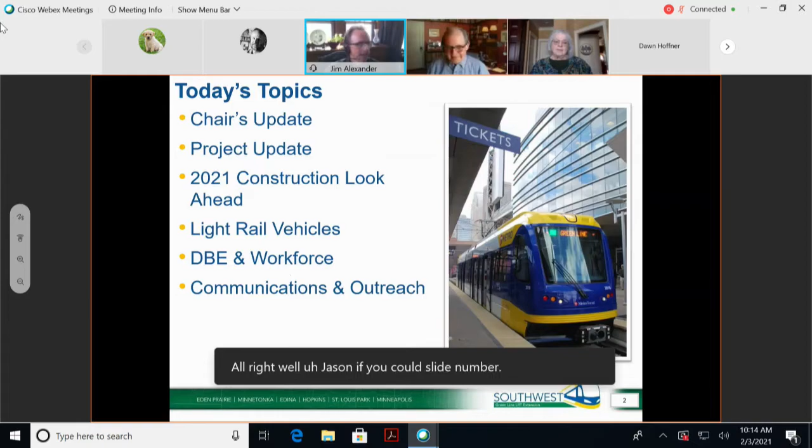All right, well, Jason, if you could advance to slide number 5, I think, to get us going here. So this is kind of highlights overview of the overall project. As the Chair mentioned, we have a full funding grant agreement now in place as of September. So that's a good thing. We're now fully funded. And there has been quite a bit of activity out there.

If you haven't noticed, they've got a lot of bridges happening and other structures getting put in place, 35% complete. And you see the list of items that we've been working on thus far. An important piece I want to note is the private utilities. 94% of that, nearly 1,000 conflicts that we have for private utilities. That's a pretty significant milestone to achieve for this type of project. These type of elements usually plague projects such as this. And so we're sitting in a pretty good spot with that.

Excuse me, I'll take a little drink here. I'm getting a little hoarse.

On the public utilities, that's handled by our general contractor doing that work, and that's well on its way as we're sitting today. Our systems contract is well underway. That's more of a design build process right now. They're going through design reviews, and that work will be following on our civil work as we get that done. Franklin, I have a couple images to talk about our O&M facility. We're doing some modifications there. That's well on our way to get completed this year.

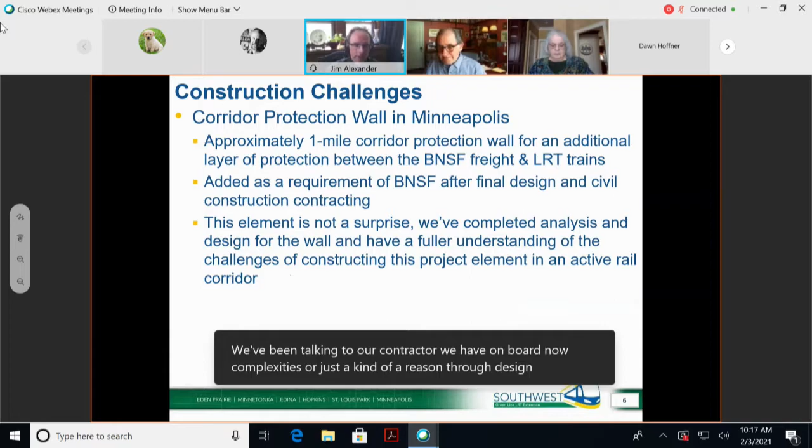And I'd just say, this element itself is not a surprise, but the challenge is that as we were getting bid documents and bids from the civil contractors, we were still going through environmental review. So as a result, we had to look to add this as a change order. We knew that going in, but as we've been talking to our contractor that we have on board now, the complexities have arisen through design reviews with BNSF and also just getting the work done. So maybe I'll go to the next slide there, Jason.

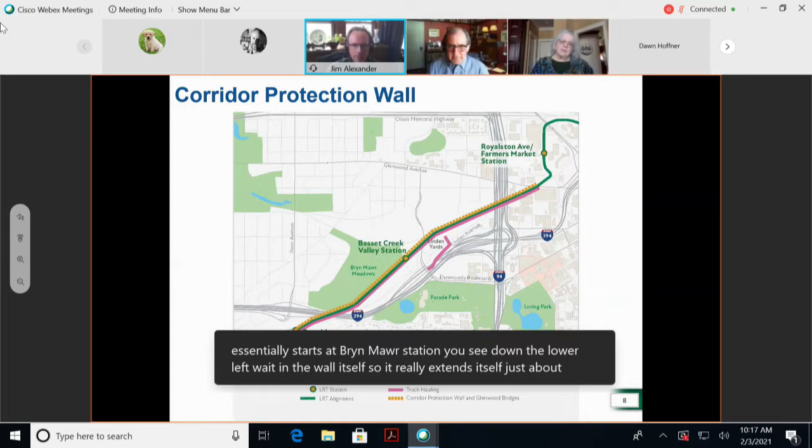So this is the location of where that corridor protection wall is. Go to the next slide, Jason. Kind of a little broader image. Essentially starts at Bryn Mawr Station, you see down the lower left, and heads its way. And the wall itself really extends just about east of 94, you see running up and down the slide there. And maybe the next slide there to kind of show you what this looks like in cross section.

So down below is the corridor protection. And as you can see, it's really integral to the light rail guideway that we're building under that civil contract, and we have a freight train to contend with. And as we've been underway with work in this corridor, we're seeing the challenges we have with operating within an active freight line. We knew that going in, but the reality of actually doing the work out there, we do have some inefficiencies of doing the work here.

For example, if a crane is located anywhere close that could potentially foul the tracks, we have to shut down operations. We have BNSF flagging out there to make sure things are safe. So it is something we have to do, but it does impact the productivity. And so this is going to be a change order to the contract that we're currently in negotiation with. So as the chair had mentioned, we don't have costs, we don't have the schedule finalized. This in itself is a big effort, and we're in the process of getting that negotiated and figured out with our civil contractor. I do have a follow-up slide to talk about this and the other element here, but maybe I'll pause there for a moment if there are any questions on the corridor protection wall, Chair.

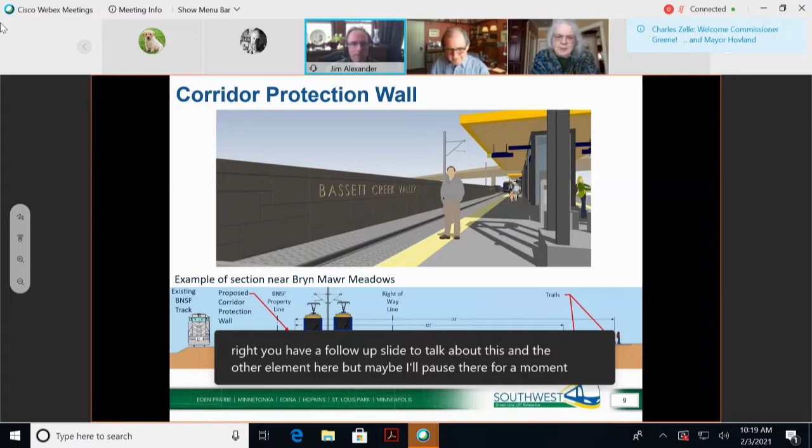Any questions for Jim on the big wall? All right. We'll move on to slide 10 then and talk about the secant.

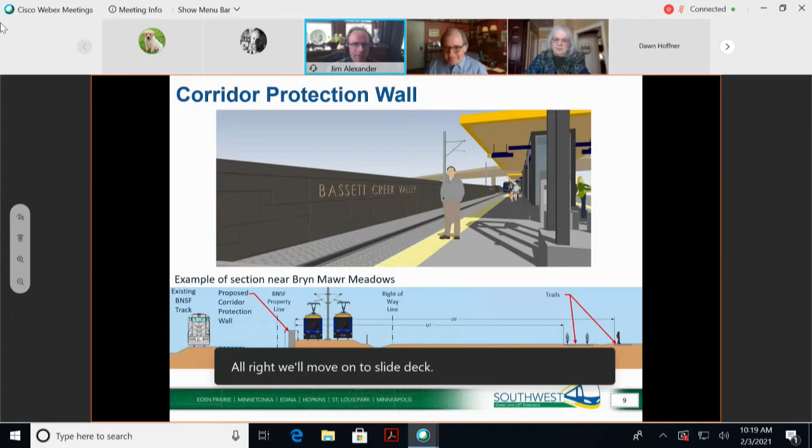So this is our other challenge, and this is also in Minneapolis in the Kenilworth Tunnel. We had experienced some settlement as we're putting in the sheet piles that will support the earth, if you will, as we build the tunnel itself. And I'll show some images of what that meant.

But in terms of looking at alternative methods, which we need to do because we're running next to a 10-story condominium building and an associated parking garage with the Calhoun Isles condominium buildings there, we need to really take a look at a different approach. And it's really out of an abundance of caution, we had to look at some alternative method to really protect those foundations of the adjacent buildings. And I'll show a cross section to give an appreciation of that. So if you could go to the next slide there, Jason.

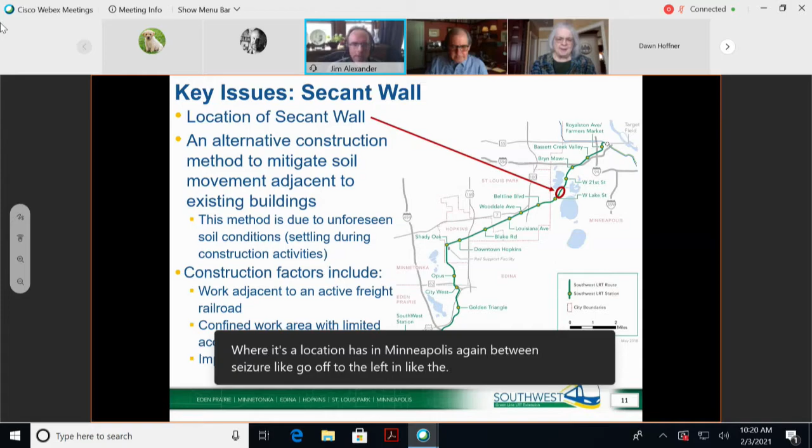So this is where the location is in Minneapolis, again, between Cedar Lake off to the left and Lake of the Isles off to the right, those blue water bodies there. And as I indicated, we're looking at an alternative construction method. We're currently finishing design on this secant wall. Maybe go to the next slide, Jason.

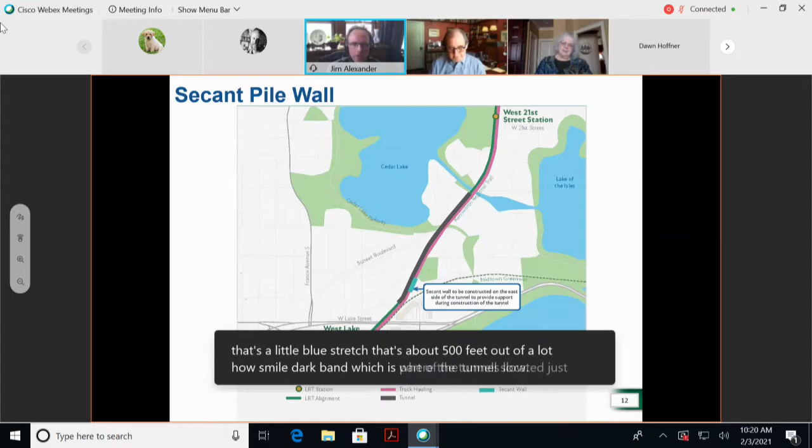Kind of get an appreciation of where that's located. So that's a little blue stretch. It's about 500 feet out of about a half mile of that dark band, which is where the tunnel's located, just north of West Lake Street Station, and just stops short of that channel between Cedar Lake and Lake of the Isles.

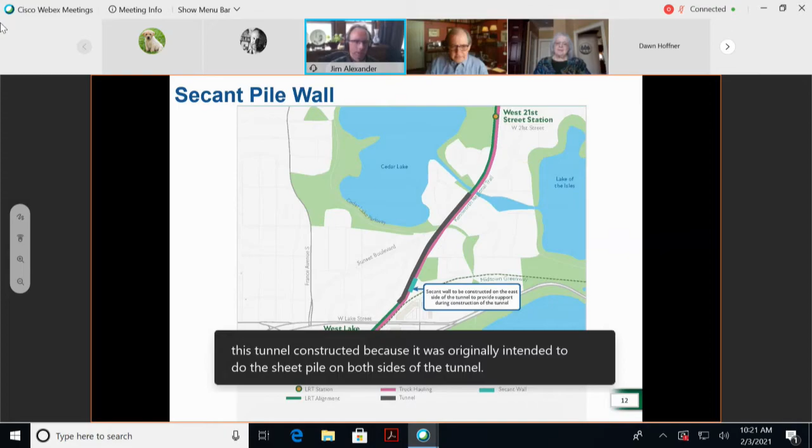And because of this, we've had to kind of retool and figure out how to get this tunnel constructed, because it was originally intended to do a sheet pile on both sides of the tunnel along that whole stretch. And because we've had to leave that 500-foot gap out of play for the moment until we get design done, get a change order negotiated, we have to work with the contractor on sequencing of the tunnel construction. So maybe next slide there, Jason.

So this hopefully gives you an appreciation of what we're up against here. The original plan off to the left shows the sheet pile walls on either side, and you can kind of see what a sheet pile looks like if you're not familiar with that. Sheet piles are generally vibrated or pounded into the ground. In this case, we had to be very mindful of the vibration sensitivities in this area. So we had a press-in piler put the sheets in.

The challenge we encountered is that due to boulders and really the density of the soil, we had to auger ahead of the sheet pile as we're pushing into the ground to allow the sheets to get in. Normally, the vibratory method would be able to drive these things pretty easily, even with those boulder materials. But because of the augering, we experienced some settlement right adjacent to the tunnel excavation itself.

And if you can imagine, it's not shown on that left drawing there, but there are footings that are very close to the tunnel there, we're talking feet and inches away from the sheet pile. We didn't want to risk the potential of damage to the foundations of the parking garage and that condominium building. And so we came up with an alternative method that you see on the right, which has a secant pile wall. And you can see what that looks like in plan view down below.

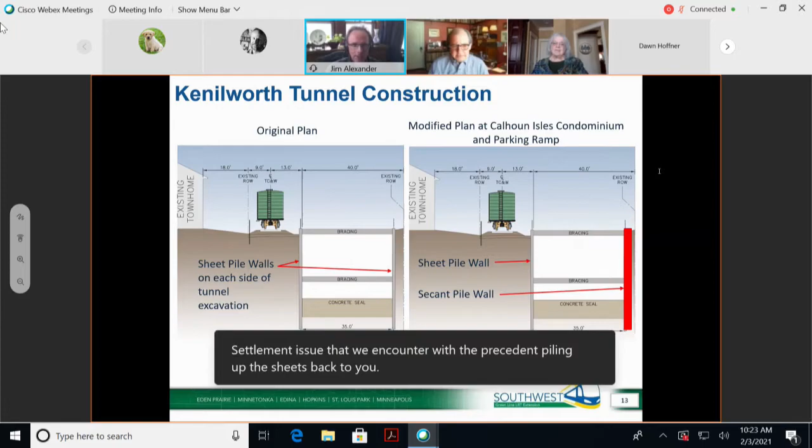I think there's been a lot of questions about, are we modifying the design of the tunnel? We are really not. As you can see on the left, original plan compared to the right, the tunnel itself is essentially about the same. We do have to narrow up the wall on the right side of the tunnel a little bit, but it's still going to be able to provide the strength that we need to have here. So what's really different here is we're going to be installing the secant pile wall for about 500 feet to support that area as the contractor builds the tunnel.

So maybe I'll pause there for a moment if there are any questions on the secant, because it is kind of involved. Any questions?

I have to say, Jim, and just as a comment, we're all becoming kind of amateur engineers here, but you've explained what the secant pile wall is, and I invite others to walk in this area. You can see how narrow this construction zone is, and we really are threading a needle with some very specific, robust reinforcement. And I think working with the Condominium Association, they've gained some confidence that we're actually, in an abundance of caution, doing the right thing to not take any risk.

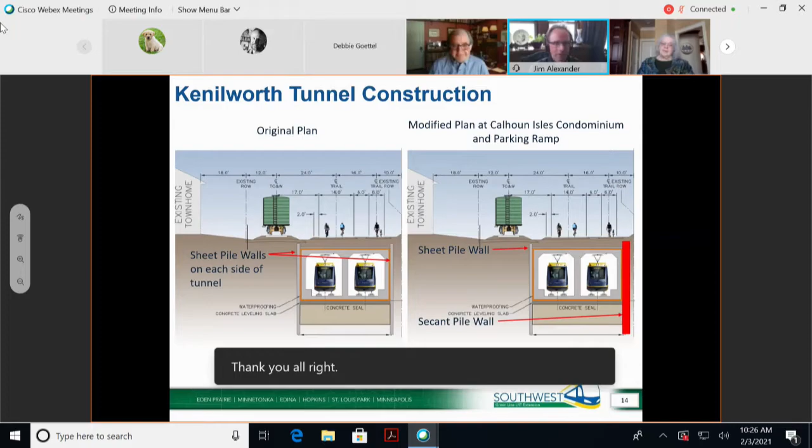Maybe, Jim, this is Jim. Oh, yes. Maybe I could ask you a quick question about how did you pick that particular type of reinforcement technique, the secant wall? Where else is that used, or why did you decide on that? Sure. This was really chosen out of just our confined space. There are many other types of retaining wall types you could use, but given that we had limited right-of-way, we had to go to something that we could stay within our right-of-way, and this does that.

This is actually used, if everybody's familiar, at a parking garage over by the Lagoon Theater; you can actually see the secants as you're exiting the structure. You can kind of look off to see the wall, and you'll see a bunch of secants. So it's a common practice. It's more expensive than the sheet piling, but this is really the alternative we need to go to given the limits. If we had right-of-way going back several feet, we could have tiebacks, those type of things, but we didn't have that luxury given the proximity of the apartment.

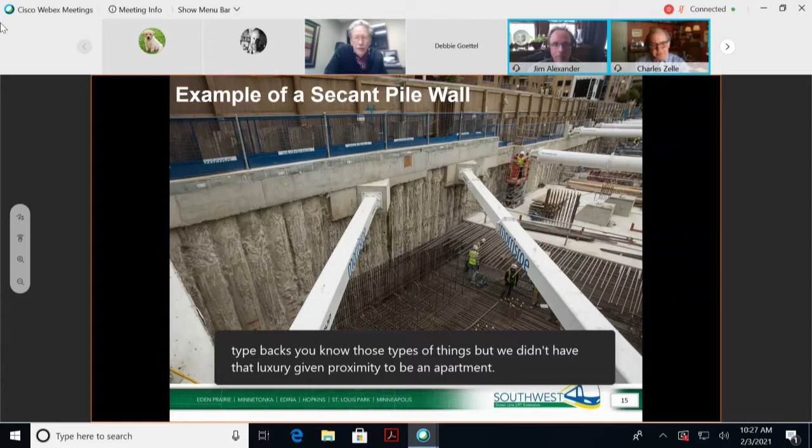But here's a good picture of one, so you kind of get an idea. Yeah, it's extraordinary, really. Yeah. So this is just an image I took off the web. This is not our project, but you can see the secants off to the left as a bunch of columns that will support, and these white members going across.

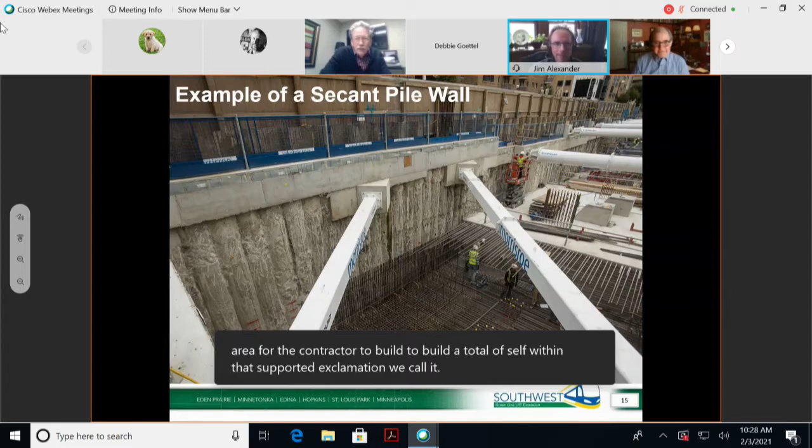Those are called struts; essentially the struts go from one side to the other, as you see in the distance. We won't have these diagonal struts here, but it allows an area for the contractor to build the tunnel itself within that supported excavation, we call it. Okay, thank you. Next slide there, Jason.

So maybe getting to the question from the commissioner is that, you know, both of these elements, I'll just say, are major projects by themselves. The corridor protection is over a mile, and we had to go through a really extensive review process with BNSF. This was an important feature for them, to make it robust in their eyes, and so we met all those requirements. But because of that, it's going to be a fairly costly item.

Now we are in the process, on these next steps, of negotiating a change order with the contractor on this corridor protection. So I don't have a cost for that at this moment, but we hope to have that identified fairly soon.

The other component is a secant wall, where we're just finishing up design plans. We look to have those done this week and get those into the contractor's hands. And we've been talking to the contractor about what this secant is going to look like to help minimize time and make sure that we're heading on a good path on this. And we'll need to initiate a change order on that piece.

And then there's also that 500-foot segment that I mentioned where we have to have the secants in. That really causes resequencing the tunnel construction compared to what the contractor was originally going to do with just sheets going down the whole half mile of alignment. And so we'll have to be negotiating a tunnel construction resequencing. This all leads up to

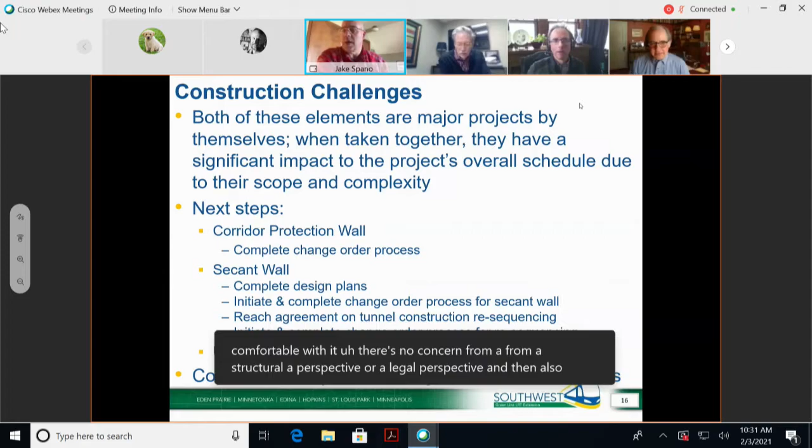My question really is about, and I know there are a few attorneys in this meeting right now, I'm not one. I'm curious if the city of Minneapolis and their engineers have looked at this and are comfortable with it, with no concern from a structural or legal perspective. And also, given the proximity to the condominium owners, I'm curious what their engagement has been so far, or their legal representation and construction folks, just to make sure that we're not heading down a process where, in 5 years or so, there are concerns and problems.

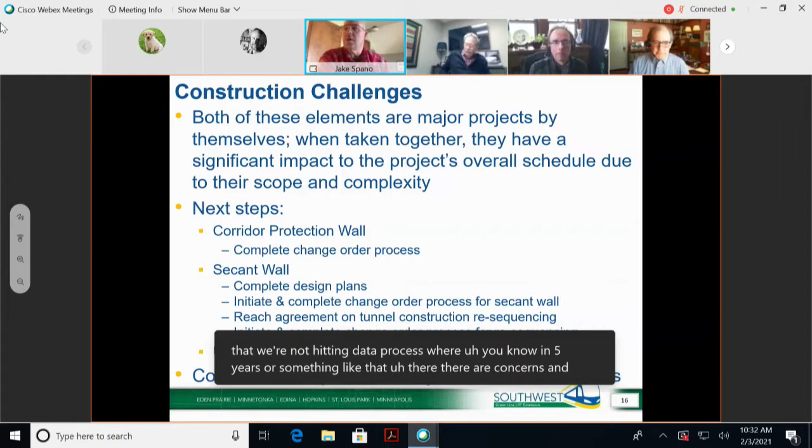So I'm curious to know, from both an operational and construction process perspective, as well as a legal perspective, where the city of Minneapolis is at. Maybe somebody from the city of Minneapolis can speak to that, but also the condo association and the other folks that live in that area. Thank you. Yeah, great, Mayor. Great question, and I'll just jump in to say hats off to the Minneapolis Public Works team, from the director to the chief engineer. Weekly meetings, they've really been at the table. But Jim, why don't you take us through this?

Yeah, I'm not sure who all from Minneapolis Public Works is here, but maybe I could start it off. We've been coordinating quite a bit with the city on both these elements in terms of getting this work done. We've also been coordinating with the Calhoun Isles Association. We have a small work group that we meet with at least every other week, and we talk about construction issues as well as this secant wall. So everybody's aware of this, and we're trying to proceed with eyes wide open on this piece, knowing it's a big change.

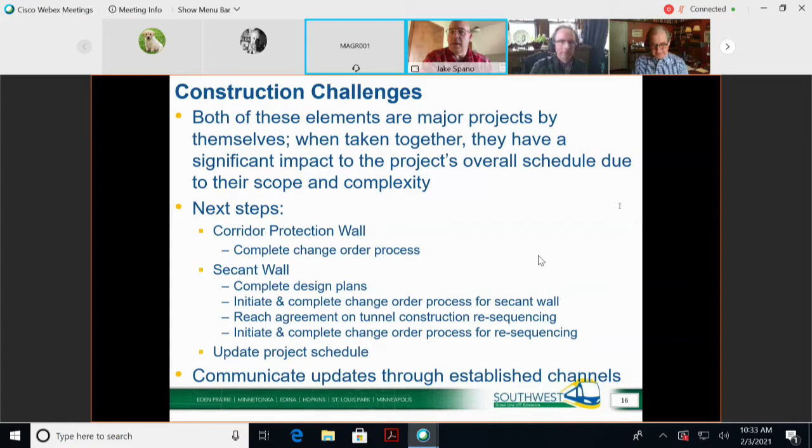Well, I just wanted to raise it because, obviously, having a conversation about it is one thing. Making sure that our legal I's and T's are dotted and crossed is another. So I just wanted to make sure that gets raised so that we proceed with, again, eyes wide open, but with all of our bases covered.

Whoever's typing, would you go on mute, please? Yeah, I remind people to press mute if you're not talking. Jason, that might be yours.

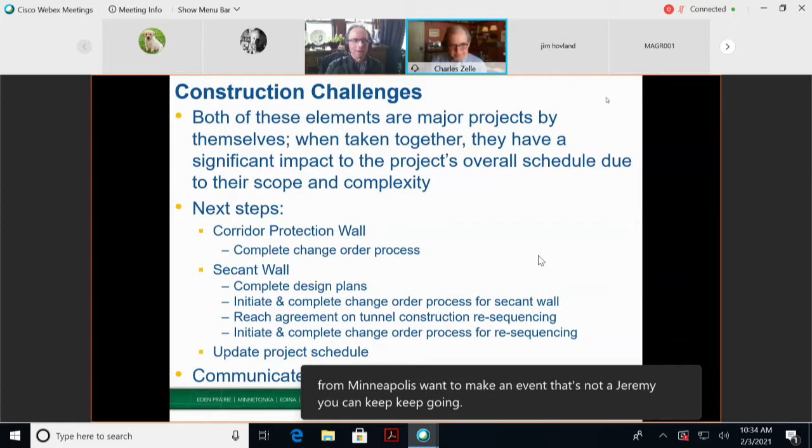Okay, let's move on to, I think we can scoot down to slide 19, just to kind of expedite things. Wanted to really kind of, it isn't just a bad news story here. There's been a lot of work out there, and if you hadn't had the opportunity to kind of cruise down toward Eden Prairie through all the cities, I welcome you to do so. We've got a lot of things out of the ground now, and this starts out at Southwest Station. Just to get you all grounded here, we are building a station that will cohabitate SouthWest Transit bus activity with our light rail trains, and we're building a 450 stall ramp. You can see off to the right here. That's kind of the starting point of getting the foundation work, starting the column work.

All these columns out here, we have about 27 miles of piles that are going to ultimately go into this station. We have about 70% complete. Still a bit of pile work to do, but this area is well underway in terms of the work. Next slide, please.

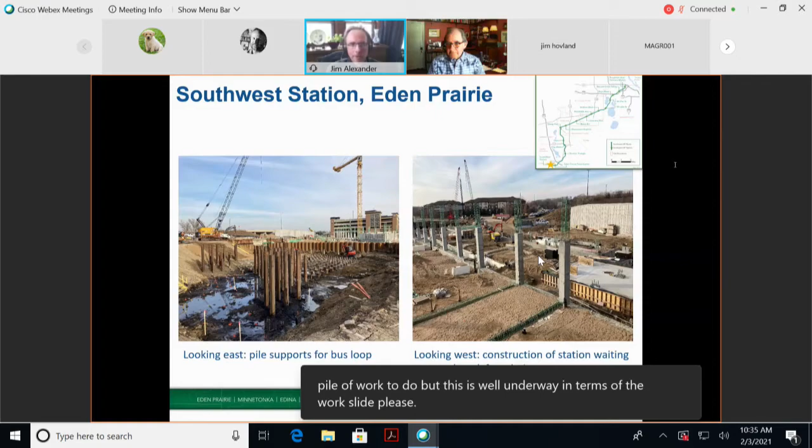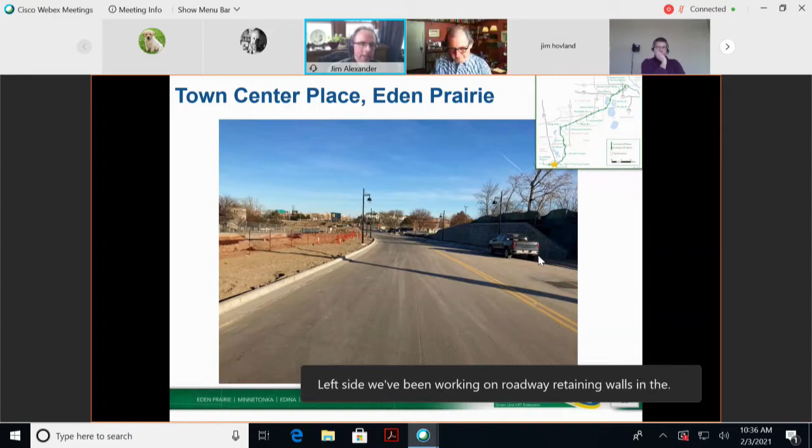Make our way just east of Prairie Center Drive, or Eden Prairie Town Center Station. This is road work. Guideway will ultimately be off to the left side. We've been working on roadway and retaining walls in this area. Next slide. I think the next slide is the station itself. So we kind of turned ourselves back to look west at the Town Center Station, starting to take shape. The retaining walls are part of the project that we built last year. Next slide, please.

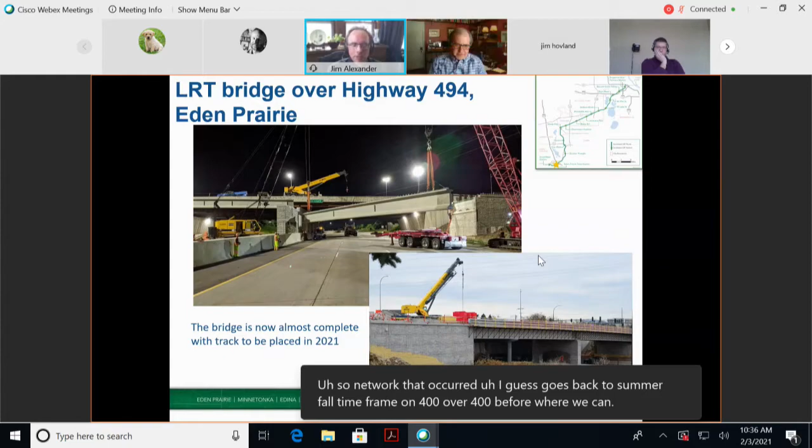Some night work that occurred, I think this goes back to the summer-fall time frame, on 494, where we installed beams for the LRT bridge that goes across. Next slide, please.

And just kind of further inching towards the east, and all these photos have a map to show you the location of where these photos are taken if you're interested. So this is down Flying Cloud. You can see some of the retaining wall work off to the right. We'll have our guideway in that area. This is just south of the Valley View Bridge, which I think is coming up next.

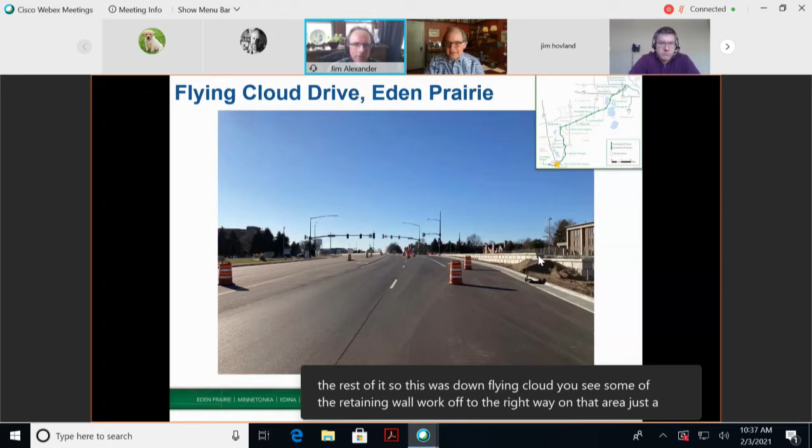Another bridge over Nine Mile Creek. This goes over Flying Cloud Drive in Eden Prairie. The deck work is out and now done. This is, of course, earlier this summer, not just a few days ago. We're a little chillier today than what this shows. Next slide, please.

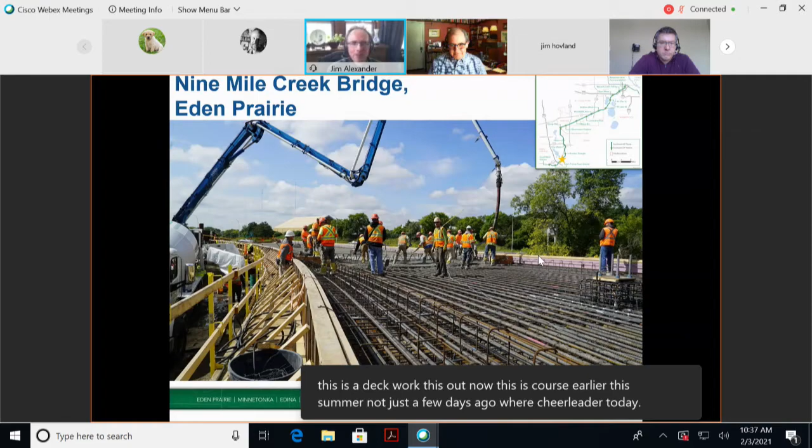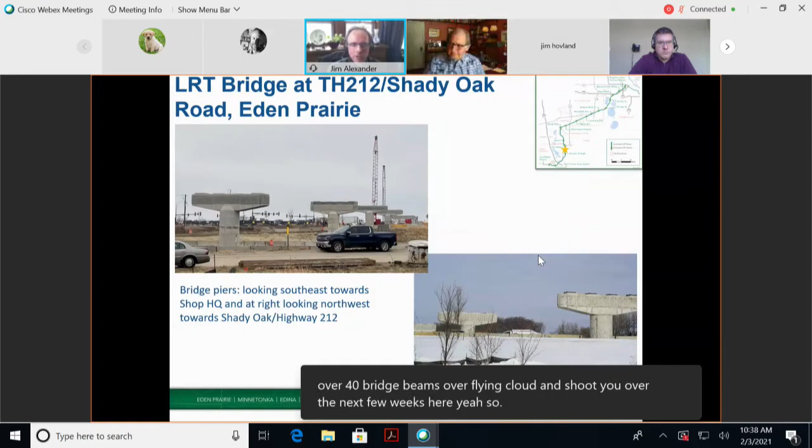This is Golden Triangle Station. So this is near 70th as we look towards the north, and off in the distance on the next slide we'll see another significant bridge that lifts off of the station. Next slide there, Jason. For the bridge that goes over Shady Oak and 212, the contractor is actually involved in putting bridge beams over Flying Cloud and Shady Oak over the next few weeks here. And so that work is still ongoing here. Next slide, please.

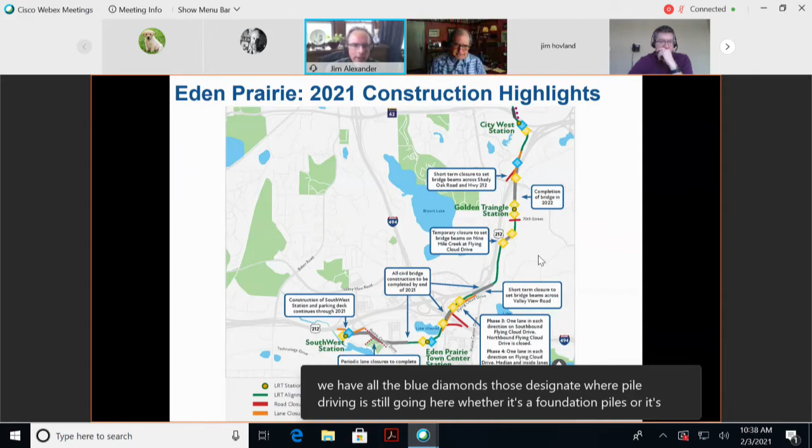And so these maps are intended to show more the high profile items and things to note. Where we have the blue diamonds, those designate where pile driving is still going, whether it's foundation piles or sheet pile for shoring. You can see at Southwest Station, we still have some work down there to do. Another 30% of that 27 miles of piles still to be done.

A little bit of work around the Town Center Station for retaining structure, fairly minor. Up by Shady Oak, just south of the City West station there, we still have a couple of bridge piers and an abutment to do for piles. And at City West, we have a lot of retaining structure up there that would require some shoring.

The other point that I wanted to note is where we have red line work, that's where roadway closures are anticipated. We have a couple of phases of construction still to do on Flying Cloud, phase 3 and 4, where we are closing various lanes to get our work done down there. And the orange line work is where there's a lane closure.

So you can see in terms of roadway closures, we have the on and off ramp at 494. And as we scoot up towards 70th, that'll be closed later in the spring when work can commence again after the thaw. And we also have an off ramp that goes up to Shady Oak, up the top there, that will continue to be out of service until we can get that work done along that stretch going up to City West Station.

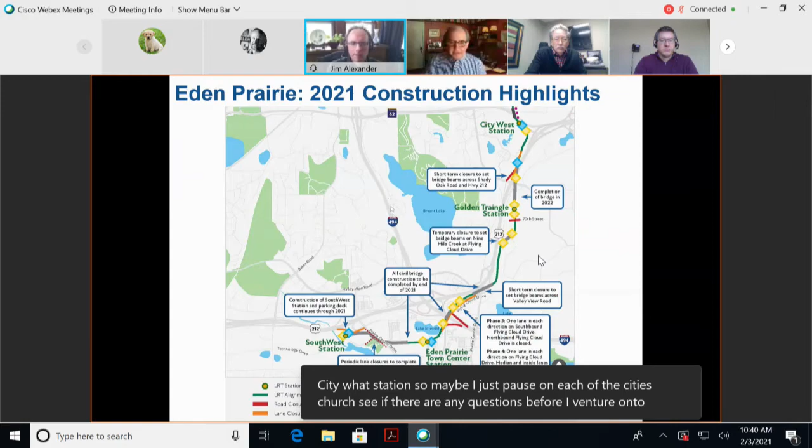So maybe I just pause on each of the cities, Chair, see if there are any questions before I venture on to the next. Great, and there is so much happening in Eden Prairie, well, in every city, but any questions on this activity? All right. Mayor Hovland, you're raising your hand. You might be muted.

Incredible amount of activity in Eden Prairie, and just wondering, as you move up into Minnetonka and then into Hopkins and then on into St. Louis Park, what kinds of activities are we seeing in those respective communities? Yes, I will have some slides to talk to that. Yeah, stay tuned, Jim. We're working backwards.

We're working north here. I don't hear Jake complaining, so there must be good things coming.

I'm not, and as a matter of fact, Jim presented to council last week, and for Mayor Hovland's awareness, I think Jim estimated we're probably a quarter of the way through construction in St. Louis Park. I think our biggest issue, just for everyone's situational awareness, is a strong sense from us, and I'm sure other communities along the line share it, about making sure that, to the extent reasonable, practical and safe, we get the bike trails back open, even if it requires temporary detours in other areas.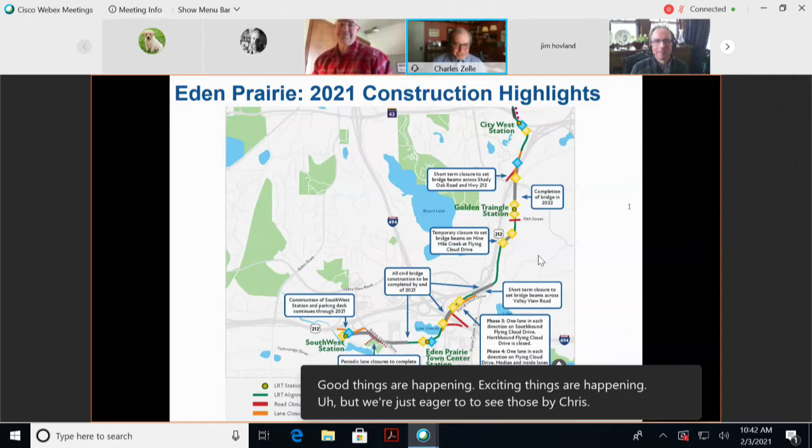Thank you, Mayor, and Jim, you can move into the next cities, but I will say I have learned new places within Hopkins and St. Louis Park I never knew about with all these detours. But it would be good to get that back in place. Keep going, Jim. Okay. All right.

Jason, let's go on to slide 33 and we can talk about the 62 tunnel. This is an earlier image. We were still shifting the lanes around on 62, but we've essentially finished the structure for the tunnel on the north or east end on the Minnetonka side, and that's where work is now commencing on the south side in Eden Prairie.

And we really appreciate MnDOT and the cities cooperating with us. It's been quite an endeavor to get all these lane shifts going. And I know it's been a challenge. We keep knocking on people's doors to ask for things.

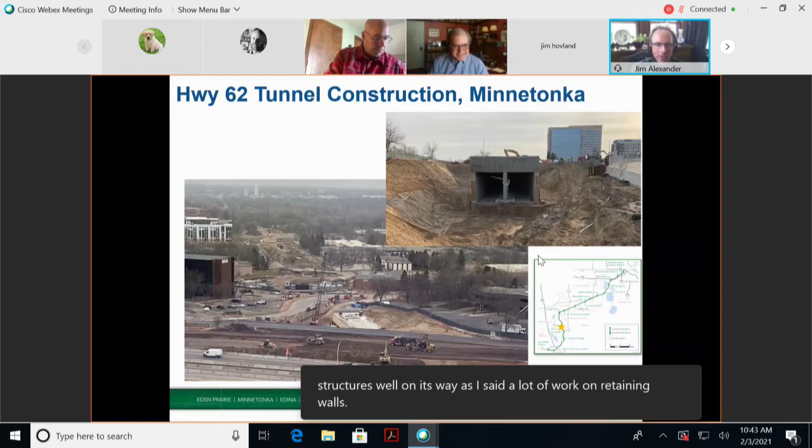And I appreciate you at least hearing us. But this structure is well on its way. As I said, a lot of work on retaining walls and the tunnel itself on the Eden Prairie side will be ongoing this year. Next slide, please.

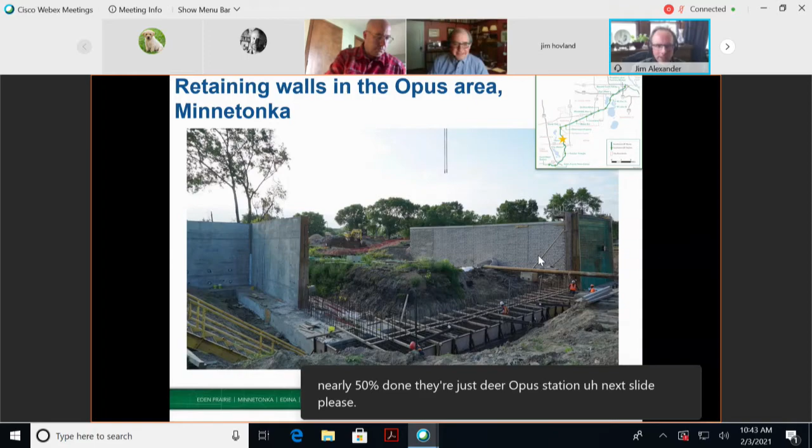So we have some retaining walls. We got a lot of retaining walls. There's 127 retaining walls in this project, so it kind of never ends. But we're progressing, nearly 50% done there. This is an image near Opus Station. Next slide, please. I think the next slide is the Opus Station. There you go. The station's well underway, and more work will be happening in '21 on that structure. Next slide, please.

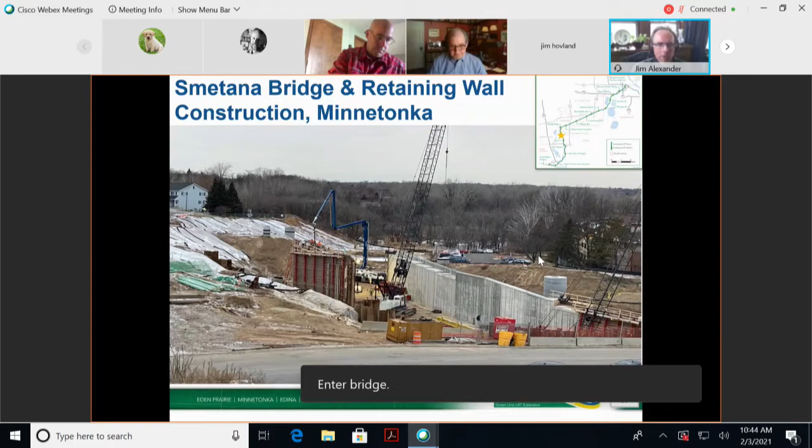So in terms of highlights, for the sake of efficiency, why don't we move to slide 38 and talk about these pieces here. So again, Highway 62, the north segment, there's still going to be ongoing finishing work with that. Most of the structure work, however, is going to be on the south side to build that piece of the tunnel. You see some blue symbols again there where there's going to be some more sheet pile for shoring in those locations. As we get up to the Feltl area, there's still going to be some piles required.

And then the long bridge we have, the Minnetonka Hopkins Bridge, you can see that just south of the railroad tracks that run diagonally south of Shady Oak Station. We still have piers for pile work and abutment as it reaches down towards Smetana and Feltl. And you see the roadway closures there. We look to have Smetana opened up later this year, and that bypass we have, we'll have to close that off so we can start working on the Feltl piece. So that'll be some more challenges with detours and whatnot.

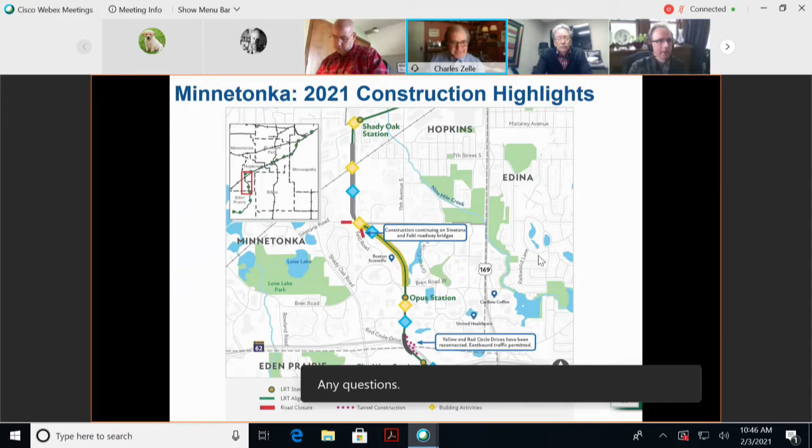A lot of retaining walls through this area, going through a very hilly area, and some of that does require some shoring. Maybe I'll pause there, Chair, if there are any questions on the Minnetonka segment. Any questions? No? All right, let's keep going.

Let's go on to slide 40, then we'll step into Hopkins here. And this is the Minnetonka Hopkins Bridge, one of our bridges that's well over 1,000, I think it's almost 3,000 feet in length. A lot of cooperation. Really appreciate the city of Hopkins coming to the table with us. So we had to work on some access pieces to get better access to this bridge to do the work, and that's all working well. And so that bridge is well underway.

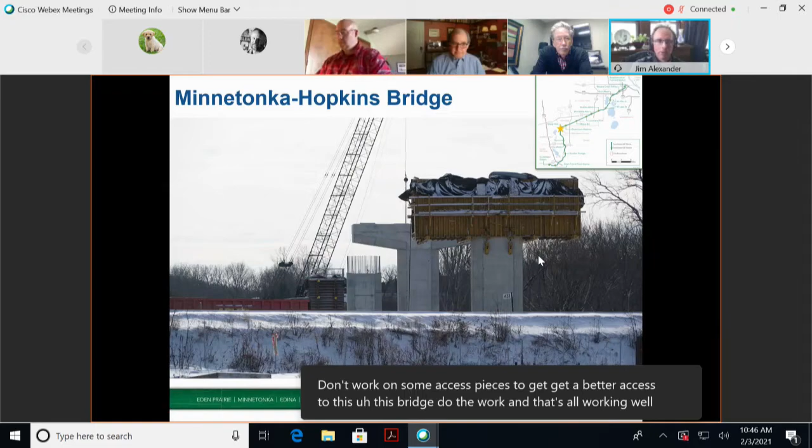As we move to the north on the next slide, we'll go up to the Shady Oak Station, and that structure is well on its way, kind of dormant over the winter right now in terms of work. As we keep progressing toward the east, the next slide there, Jason. This is 11th Avenue crossing. This was done earlier in 2020, so this is where the LRT crosses over. So we essentially have what's called the tub sections, if you will. The rail will still need to be put in place, and that's all going to be recessed into that tub, and so folks can drive over there easily.

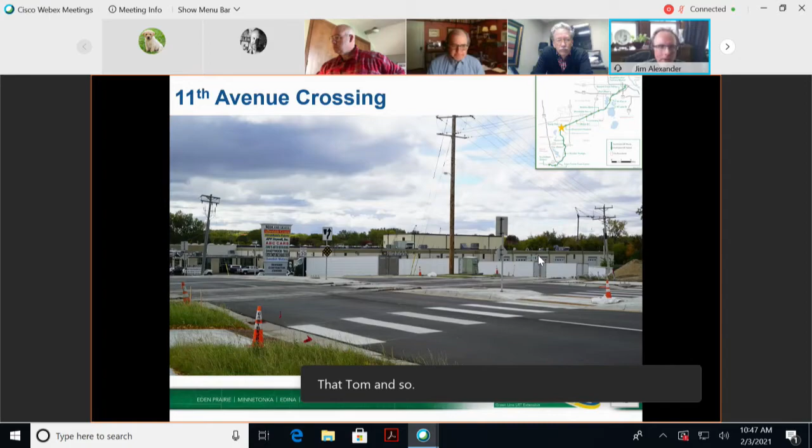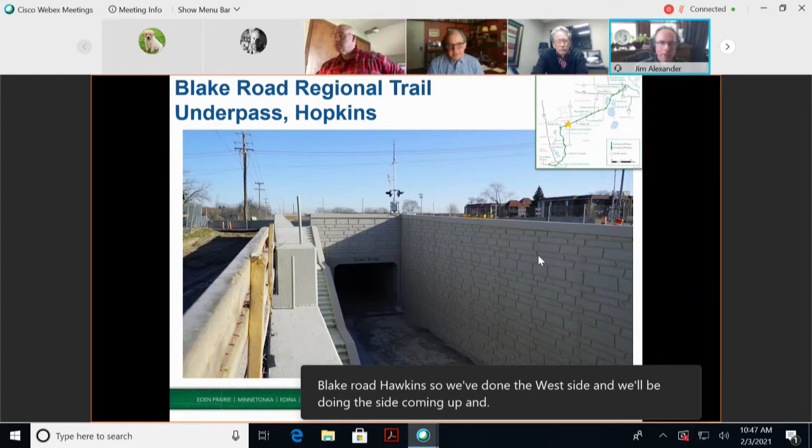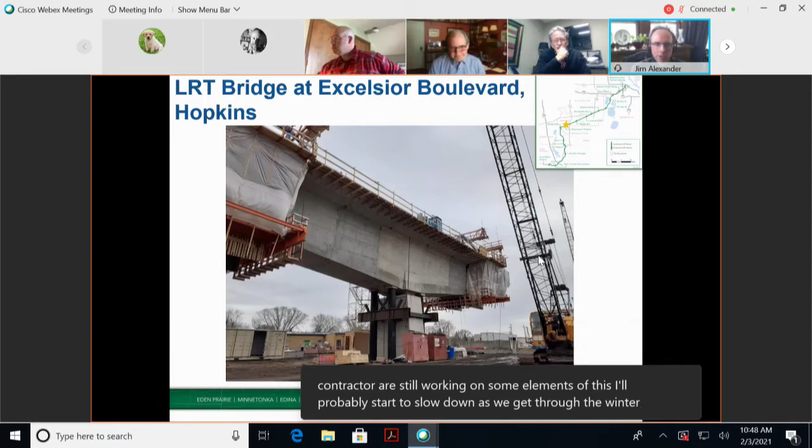And so the contractor is still working on some elements of this. They'll probably start to slow down as we get through the winter and start picking up in the spring as the warmer weather comes. Next slide, please. So why don't we do the same thing, Jason? We can go to the map and talk about the elements here.

So not a lot of pile driving in this area, but we do have some roadway closures at 8th Avenue. We need to do some closure there to do the crossing for the LRT at that location. We'll have a little bit at 5th Avenue. At Excelsior, that's going to be as that work progresses. You can imagine as we're going across the roadway, we will need to shut down lanes and then possibly actually have roadway closures as that structural work gets over active roadway lanes, just to keep things safe. We don't have motorists going underneath us as work is making its way across that roadway.

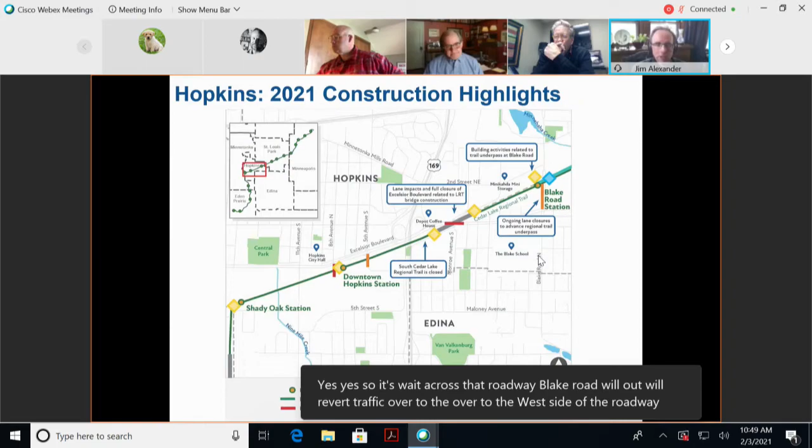Blake Road will revert traffic over to the west side of the roadway to do that tunnel work on the east side and to complete that pedestrian tunnel. That tunnel has been a bit of a challenge for us. We've got some tricky utilities, and just the fact that it's cast-in-place concrete, we couldn't do a precast because we're below the groundwater. It's posed some challenges, but we're getting through it. Maybe I'll pause there if there are any comments or questions on Hopkins.

Sure, Chair Zelle and Jim, this is Mayor Gadd. First, with the Blake Road, I'm very appreciative of the project office on how you've been able to work with us on maintaining access, especially on Blake Road with that tunnel construction. I know we had to have it fully closed for a while, but maintaining access at least one way during this is very key for the residents that live in that area. And I concur with Mayor Spano too on getting the trails open as soon as we can. Even before the end of the project would be key.

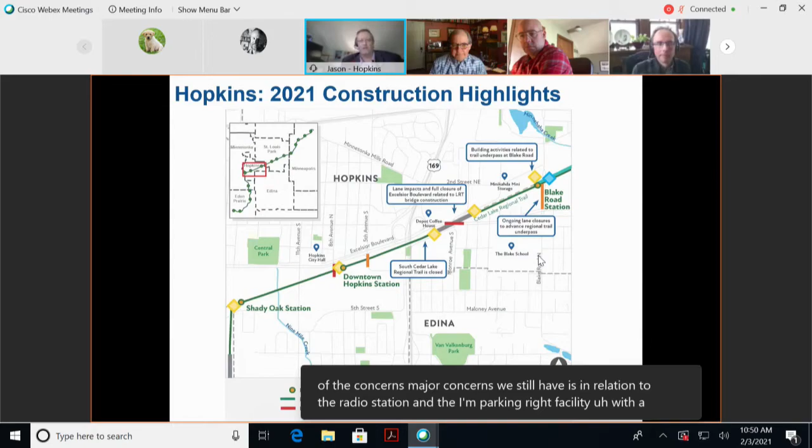And then the final comment, it's one that I know when you presented in front of Hopkins Council here a little while ago, one of the major concerns that we still have is in relation to the Shady Oak Station and the park and ride facility with the 1,000 parking spots that are scheduled to go in that station area. We continue to have some discussions on options for that, and I know we'll be reaching out again with the project office to you, Jim, and taking a look at what other options we can continue to explore on that. But just appreciate you being willing to continue that discussion.

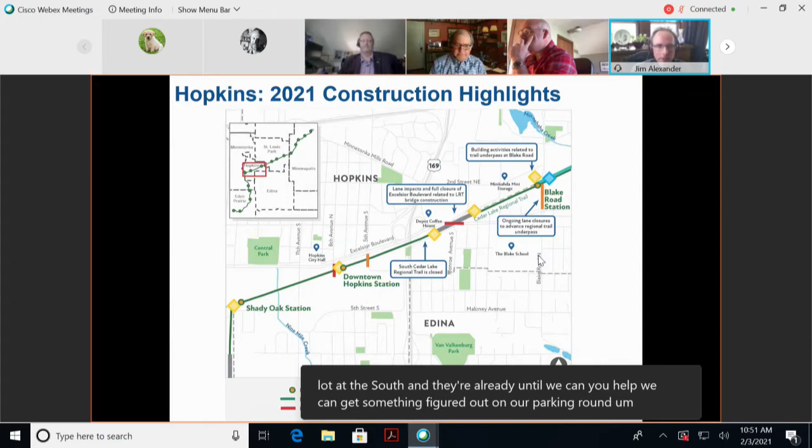Yes, Mr. Chair, Mayor, I appreciate those comments. To get everybody dialed in over at Shady Oak Station off to the left here, our current program has parking on the north and also on the south. And we have to do a change order because of the OMF. We took that out of the project, and I committed to the city that we would defer, at least for the time, doing the parking lot at the south end of there until we can, if we can, get something figured out on a parking ramp. The funding is the question, and I did indicate the project doesn't necessarily have the funding for that, but we're open for partnering to see how we can get that done. So I think we still need to have more conversations on that, certainly.

I should probably address my big elephant in the room. This Cedar Lake Trail. We had planned to have this open in '21, and just due to really the complexities of what we've got in hand, we aren't. I'm just being frank with everybody. I don't think we're going to make that. We're probably looking at '22. And as I talked to the City Council of St. Louis Park earlier this week, those of you who know me, I'm an avid bicyclist, and I'm on these trails, making sure we can get these done as soon as we can, and we will continue to push that.

I would say, as a bicyclist, there are alternative routes to get through east-west. They're not as nice, certainly, as the trail, but I use them quite a bit. But I won't drop the focus on this trail stuff. This is important to me just personally, so we'll keep a fine-tuned eye on it.

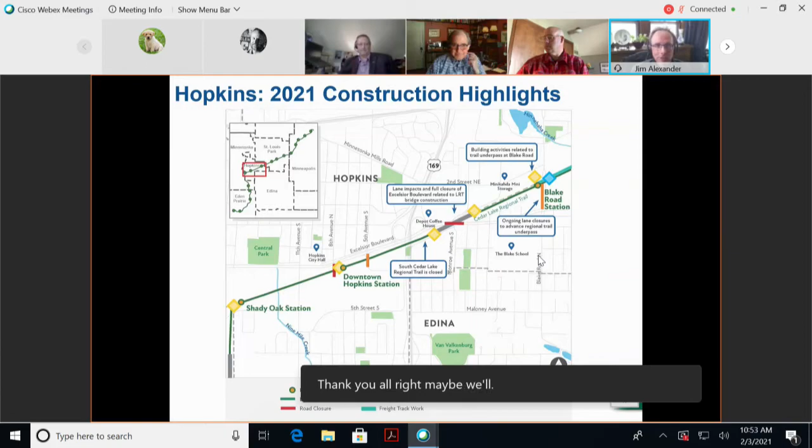Thank you. All right, maybe we'll step into St. Louis Park. Other questions? Sure. You're bearing with me with all the photos. I thought it'd be good just to show some images of what's going on out there if you don't have a chance to get out to see what's going on.

So this is a bridge that we're building over the Minnehaha Creek in St. Louis Park, just over the border from Hopkins, and we built the freight and the regional trail bridge, and the LRT bridge still needs to be done. They'll start work this year, as I'll talk about when we get to the map. So you progress further to the east there.

Next slide. So this is the trail bridge, and you can't see it just next to it, but the new freight bridge. Ultimately, there'll be an LRT bridge that gets built just a little bit south as we make our way down to Louisiana Station, which would be off the left of this slide. Next slide, please.

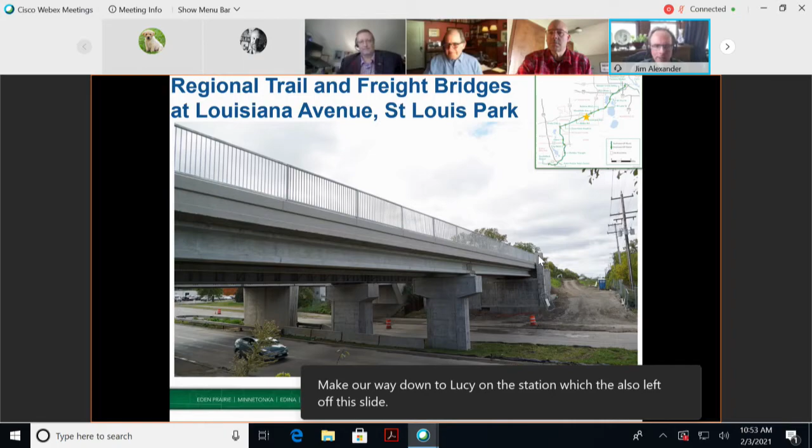Another tunnel, Wooddale Avenue. This actually has been completed. The structure is completed all the way through. Thank you to the City of St. Louis Park for accommodating our closures. We still will have some closures as we look to get the LRT crossing just south of this, but that has really helped to get through this. This has been an easier tunnel to do because it's precast.

We don't have the groundwater table to contend with, and with that said, just for all of you, anytime you're building something, if you can build it above ground, you consider that. Going below ground, there's always all these surprises, and as we're finding, you're going to encounter things you had no idea about, and that's just my personal recommendation from our lessons learned on this thing. Let's move on to the next slide.

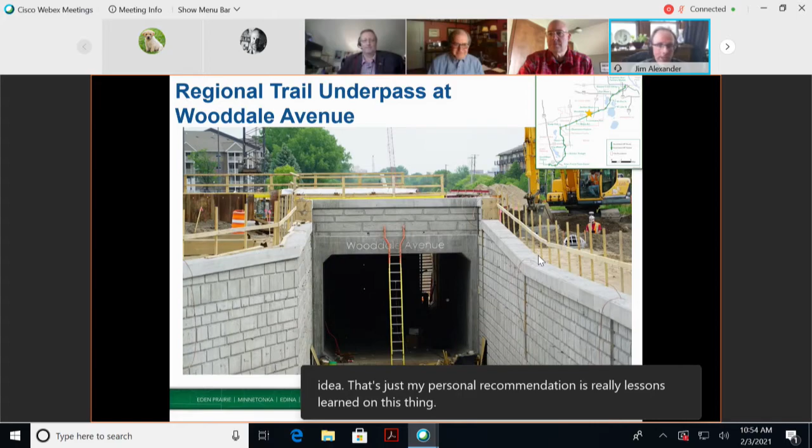So Jason, I didn't gear you up on this, but I was hoping you can animate this. Just click on this to show. This is the freight bridge that got put in place, I think back in September. I don't know if you're able to do that. No, we essentially took a 2-hour video and condensed it in a couple of seconds. And if we can't activate it here, we'll have the link for you to take a look at your leisure.

But essentially there are, let's see, 1, 2, 3, 4, there are 6 rollers, hydraulic rollers that work in concert with each other to move this bridge that weighs about 1.2 million pounds about 50 feet. The contractor geared up a lot of time to do this. I think we had about 8 hours of prep and got it done in about 2 hours. It was actually a pretty efficient operation.

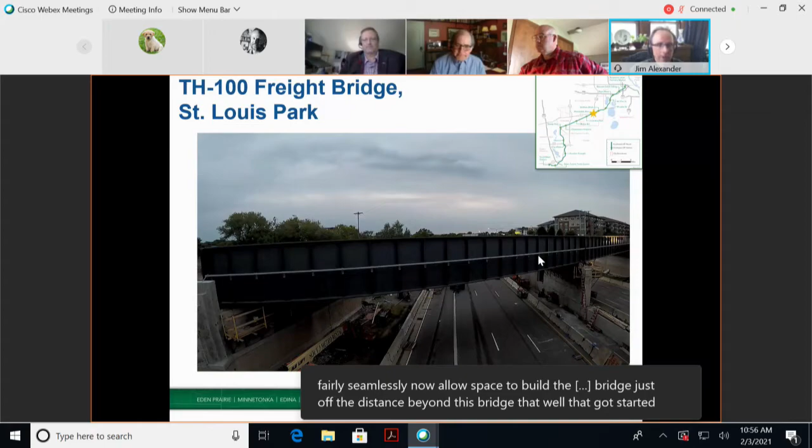I was pretty impressed. Worked closely with MnDOT on the closure, of course. We're thankful to MnDOT for doing some early preparation so we could get this going fairly seamlessly. Now it allows space to build the LRT bridge that's just off in the distance beyond this bridge that got started last year. We'll be doing some beam or deck work later in '21 here. So next slide, please.

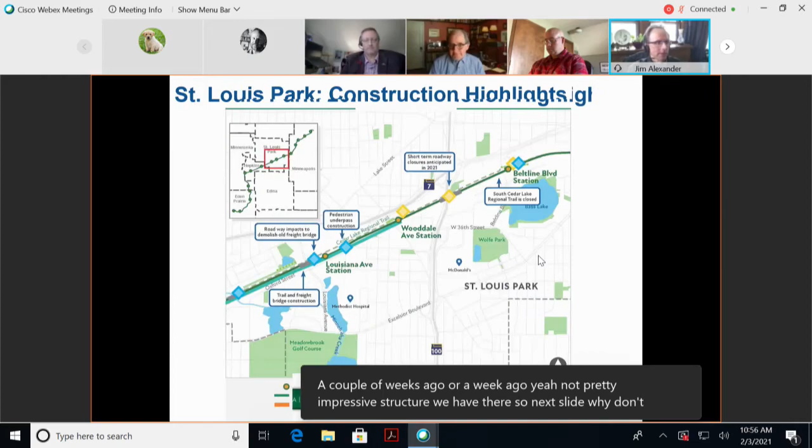Why don't you go to the map here, Jason, on slide 55 or 56, and I'll kind of walk through the pieces. So again, here the blue would denote pile driving. We do have a bit of activity still yet to do, starting at the creek area for the LRT bridge, and moving over to Louisiana for the LRT bridge at that location. And then you can see the pedestrian underpass.

We have some pile activity associated with the satellite connector. You recall that we're connecting the Bass Lake Spur, which runs parallel to us on the alignment and links up to the MN&S track that runs north-south through here. And so there'll be some pile driving associated with that structure, and also retaining wall work.

And then a little bit of sheet pile work down at Beltline area, not to the big extent like they are for the bridges, but there's still some. I would say that we've got quite a bit of activity slated for this area. Louisiana has some challenging soils we're taking out, so there'll be a lot of earthwork activity in that area. And you can see there's some roadway closures.

We're coordinating with the city on Louisiana as we take that freight bridge out, the existing one, to make room for the LRT. We'll have to take that out, and realizing there's another bridge off of the project the city's doing that is out on Louisiana, so we'll be coordinating that with them on that. And then Highway 100, as I mentioned, we'll be shutting that down, likely over weekend work to do deck placement in that location.

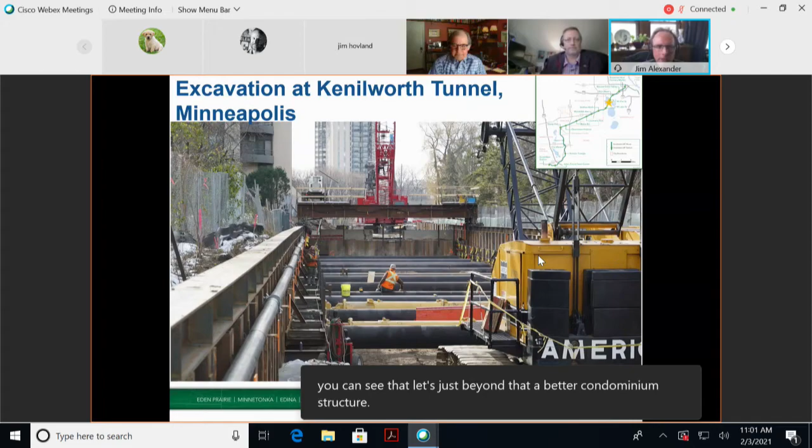Next slide, please. So a lot of work on freight in this location. This is the channel I spoke of between the two lake bodies, Cedar Lake and Lake of the Isles. We have a new freight bridge, thank goodness, because we were having to contend with maintenance of the existing bridge, and we're glad to be done with that. So we have a very safe bridge that TCW can operate their trains over. Next slide.

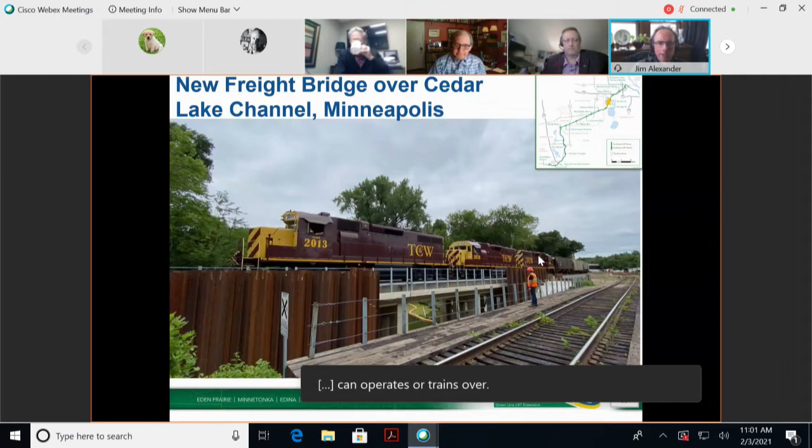Next slide, please. So this is kind of debated whether showing this image is not a lot here, but this is 21st Street Station. You kind of just get an idea of the network of cabling that goes into these stations. It gets pretty busy. Of course, work is dormant here over the winter time. It'll be picking up as work allows as we thaw out.

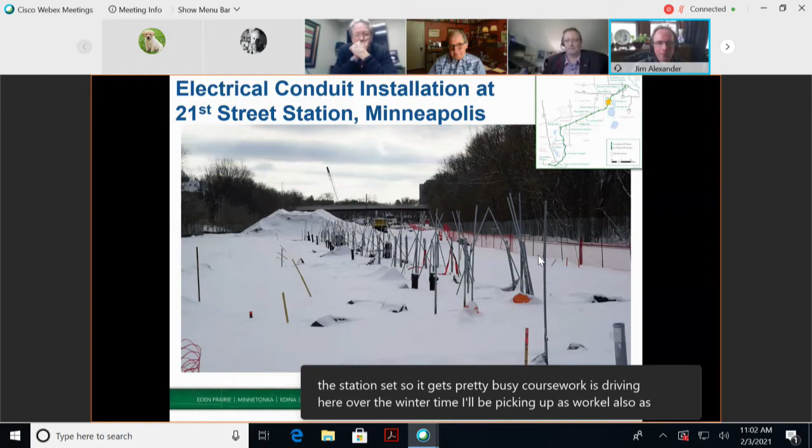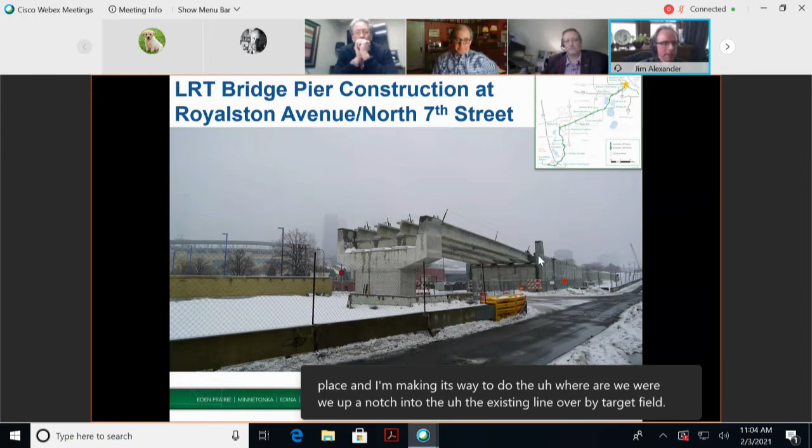So this might be the last image. This is up by Royalston. A lot of retaining wall work here as well, setting the bridge beams over 7th. This will end up wrapping around Mary's Place and making its way to where we notch into the existing line over by Target Field. And next slide, please. Okay, similarly, I wonder if we could just go to the first map on slide 65.

So we'll be working on Westlake Street Station. That has auger cast piles, not driven, at that location. We will continue with the freight rail improvement work. And that's one thing I didn't note. These maps do show where the freight rail improvement work is going to be in turquoise. So you'll see that in St. Louis Park and Hopkins as well. And of course, the Kenilworth Tunnel, that darker band going up, we'll be working on that.

The first cell is going to be just north of that, where that Secant Wall is going to be, this time in yellow. And Cedar Lake Channel, we still have an LRT bridge to build and a pedestrian bridge ultimately. And we look to 21 working on the LRT bridge. We still have piles to drive on that north side, and probably more likely in later years, 22, we would be looking to do the pedestrian bridge with the pile work as well. I mentioned the 21st Street Station that will be advancing. Maybe go up to the next slide there, Jason, to 60.

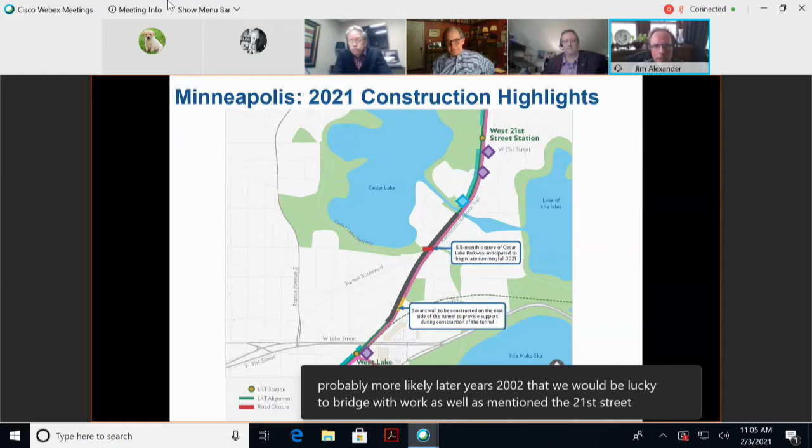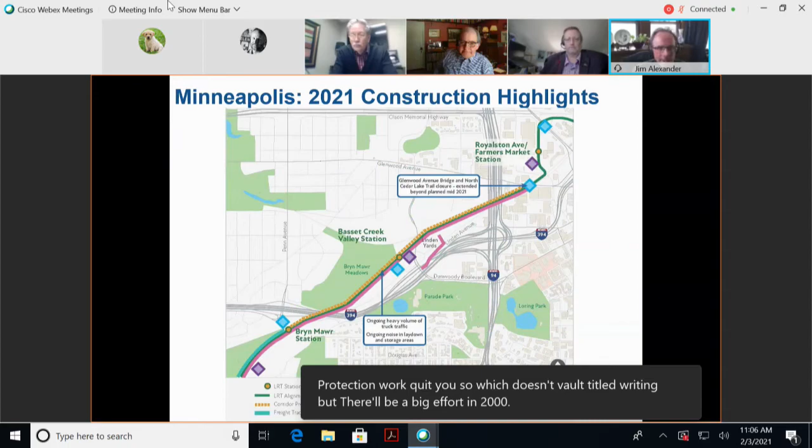But the big piece here is the corridor protection work, which doesn't involve pile driving, but that'll be a big effort in 21. So I think that's it for Minneapolis. So maybe I'll pause there for a moment if there are any questions. Any questions on Minneapolis?

All right, hopefully I'm not putting people to sleep here.

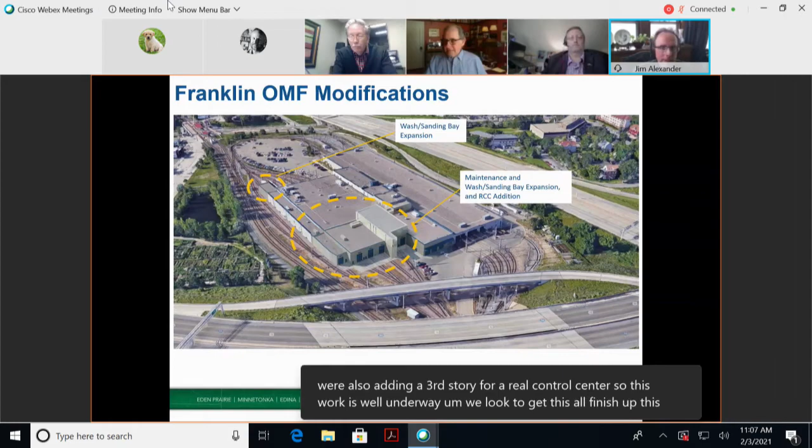We look to get this all finished up this year, and then maybe the next couple of slides show kind of what this looks like. So looking southward, that maintenance bay and the RCC up above, that's all enclosed now. This is an earlier photo, so work is mostly interior for that piece of the facility.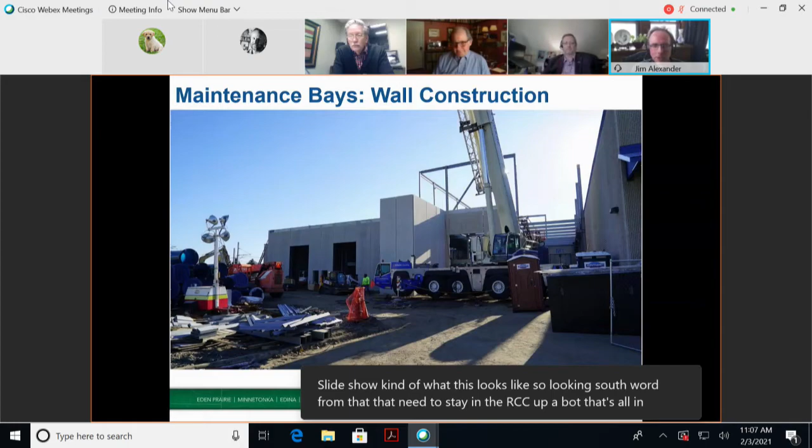Next slide. So we were in a conundrum when we dropped the OMF, trying to figure out what we're going to do with all our vehicles, because we were bringing 27 new vehicles, and this site is really crammed with vehicles. Typically, we like to store inside just for maintenance purposes, but in this case, we had to look at efficiencies here. So we're looking to build some west runner track, if you will. This is along the west side of the storage area, where we're building some track to accommodate those additional vehicles that we'll be getting for the project.

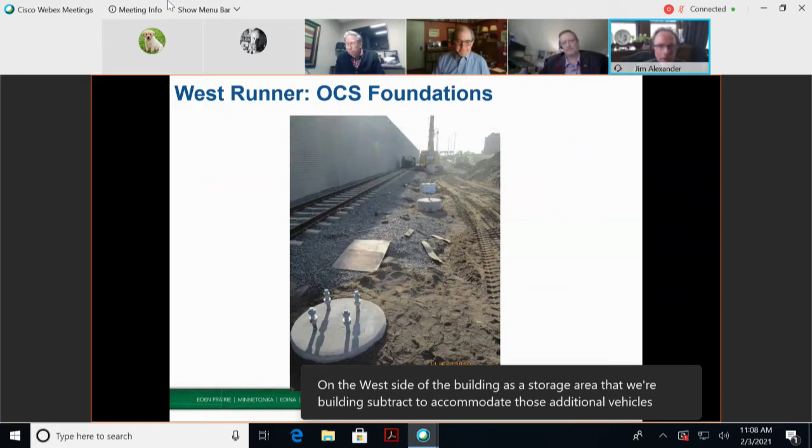And maybe next slide. Might just roll into systems, just a couple of testing slides. You can go on these next slides here. So these are just testing slides for part of our traction power that's underway, and the next slide for the OCS first article testing. Next slide there, Jason. So this is down in Nebraska, I believe, earlier in December or so. And so testing is well underway, as well as design effort on that contract.

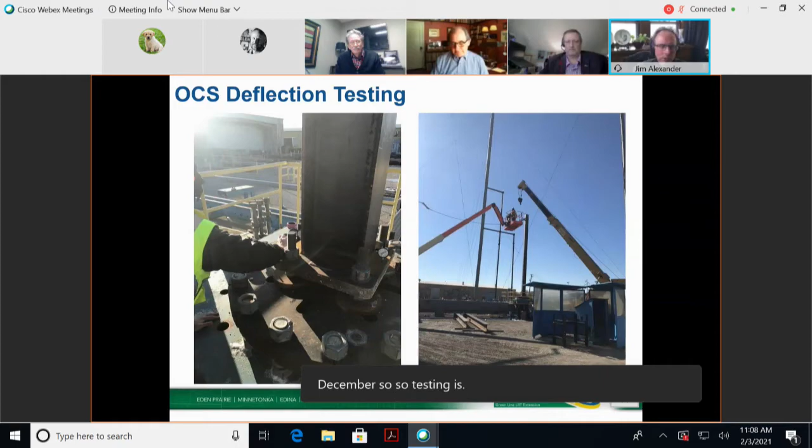Next slide, please. So light rail vehicles, we're in a good spot with the vehicles. Unfortunately, we're not going to be in revenue service like we had intended. So we'll have 27 vehicles on our hands that we're going to start having to figure out how we work those. And we're already working with operations about how they're going to mix in with the Blue and Green Lines as we speak.

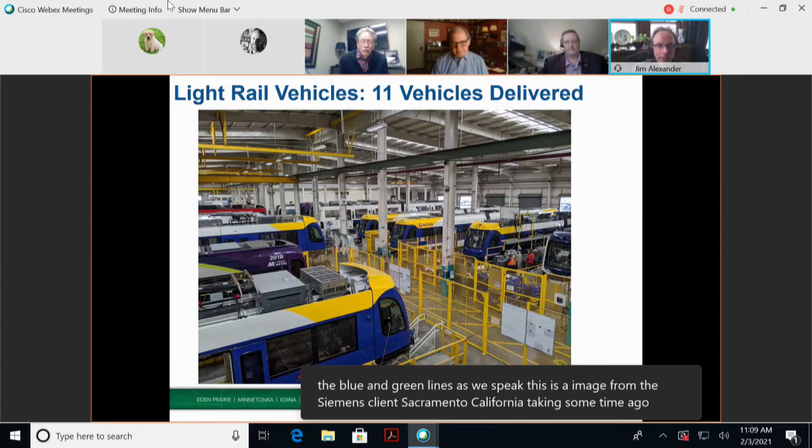This is an image from the Siemens plant out in Sacramento, California, taken some time ago, but it gives you an idea of how they put all these pieces together. It's actually pretty amazing to see them taking all the components on paper and putting them into a vehicle. Next slide.

We actually did some work with the Transit Accessibility Advisory Committee some time ago and did mock layouts to see how best we could have better accommodations. We think this is a good fit.

Next slide, please. So that's an image I think I even took out in Sacramento. This is back in warmer... well, it's always warm in Sacramento anyway, but this is earlier. This vehicle is in town now, and we're looking to get that on revenue service here very quickly.

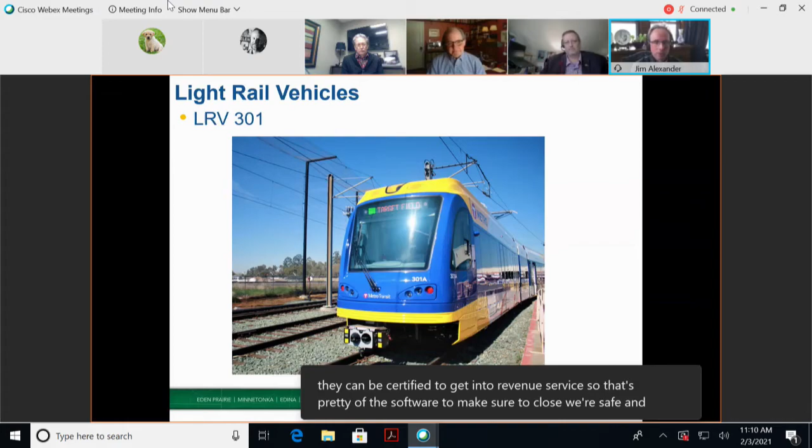We go through a series of a lot of testing and commissioning of these vehicles before they can be certified to get into revenue service. So it's a pretty laborious effort to make sure these vehicles are safe and operationally functional before we get them in revenue service. So next slide, please.

Well, that concludes my piece. Happy to take any questions or comments.

Thanks, Jim. Because our time is short, let's jump right into our DBE and workforce update from John from our Office of Equal Opportunity, and take it away. Thank you, Mr. Chair. All right, so let's jump to slide 80.

And as Jim mentioned before, there's a lot of uncertainty regarding the schedule and cost impact. So we've received some concerns from DBEs about how this will impact them, and we're monitoring it pretty closely with the prime contractors because we do know that each DBE has a different type of scope within the contracts. So they will be impacted a little bit differently, but we trust that our engagement with the prime contractors and the DBEs will be helpful, especially when we start looking at different ways to address their concerns and looking at ways to resolve the impacts and minimize the impacts. So

Here is the table of the achievement for the different contracts. As you can see, the civil contract is about 40% billed to date. And they've built up a 4% cushion there. The goal is 16%, and they're achieving 20%. So I think that will definitely help out moving forward in the project, considering that there are some unforeseen things. So we have a cushion there to help out.

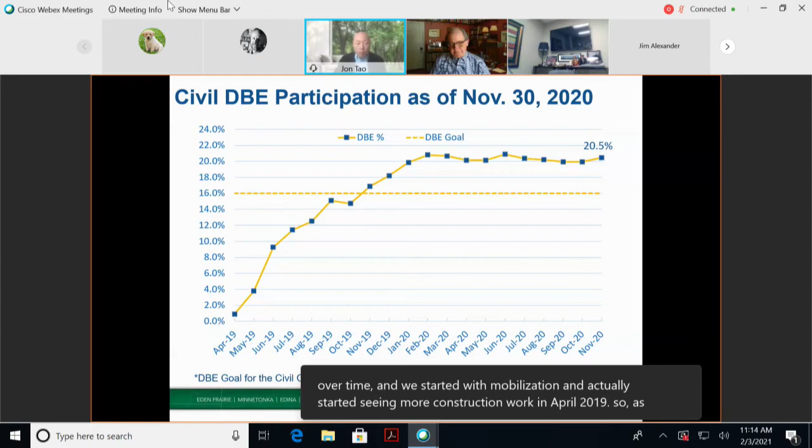So this is a trend chart just indicating the achievement over time. And we started with mobilization and actually started seeing more construction work in April 2019. So as you can see over time, we've been able to increase the participation and remain above the 16%. And that's where we want to be and try to hold on to this achievement consistently throughout the end of the project. So next slide, please.

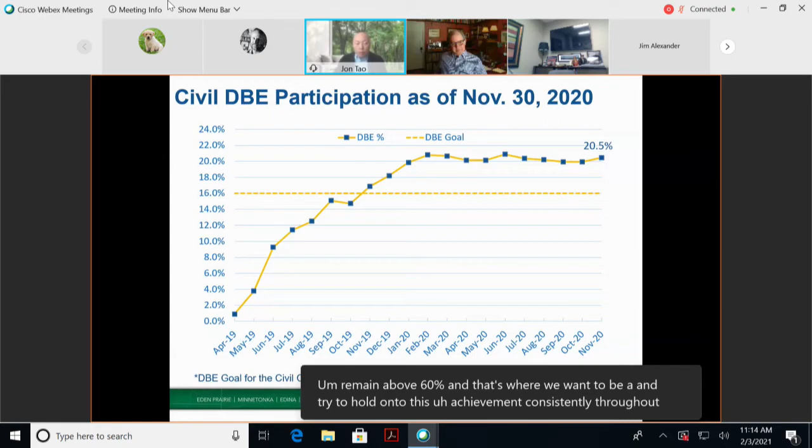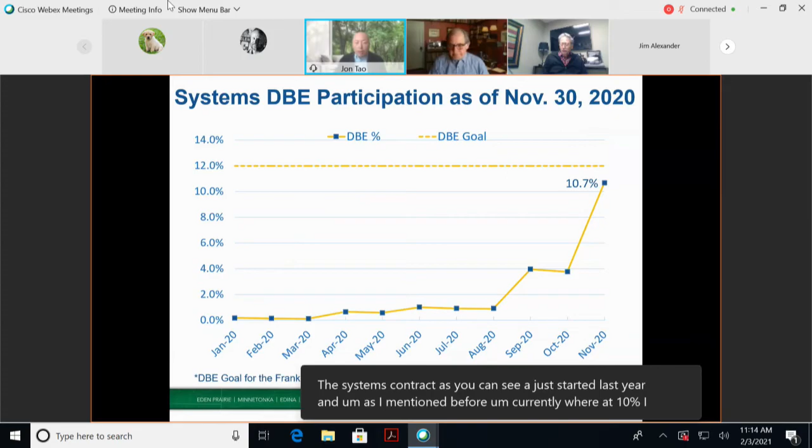The systems contract, as you can see, just started last year. And as I mentioned before, currently we're at 10%. I expect us to be a lot higher once we start seeing the actual construction and the construction sites being handed over to the systems contractor. But overall, it's good to see the achievement moving upwards. So next slide, please.

The Franklin contract just started in July 2020, and they're moving upwards. They are about a third of the way through. So their participation is also going to be going upwards. There are some items that I believe in the recent month they have billed, and I believe they are a little bit higher than the 9.6% in this month, but it's a good sign for us to know that they will be doing construction throughout winter. So next slide.

And then regarding workforce, this is the civil contract, and the participation on this overall workforce, women are at 8%, and people of color and indigenous folks are at 21%. So in the month of November, we do see an increase in participation, which is helpful in bringing up the overall cumulative totals. And then when we're looking at the women participation, it's not at 20%, but when you look at other larger construction contracts in the region, such as the 35W@94 contract over there, they are around 7%, and ours is at 8%, 9%. So we are a lot higher than what's going on in the region here.

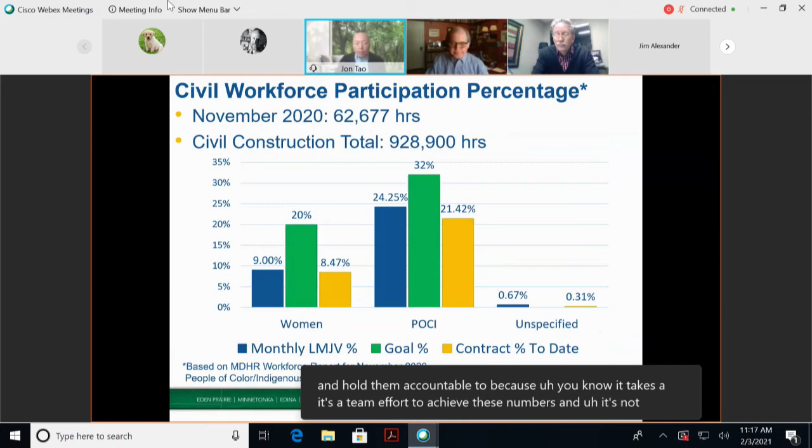So we're looking at all the different places to see where we can increase participation. Next slide, please. And then this is the participation over time. So you can kind of see we're kind of hovering at 8%. And this coming year,

LMJV has a new equal opportunity compliance officer that we're working with. And they are indicating that they want to roll out some new initiatives to increase participation. So we're looking forward to that, to see and work with them and support them in those initiatives to help promote them in our community, especially considering how many folks are out there looking for jobs right now. So stay tuned to see that.

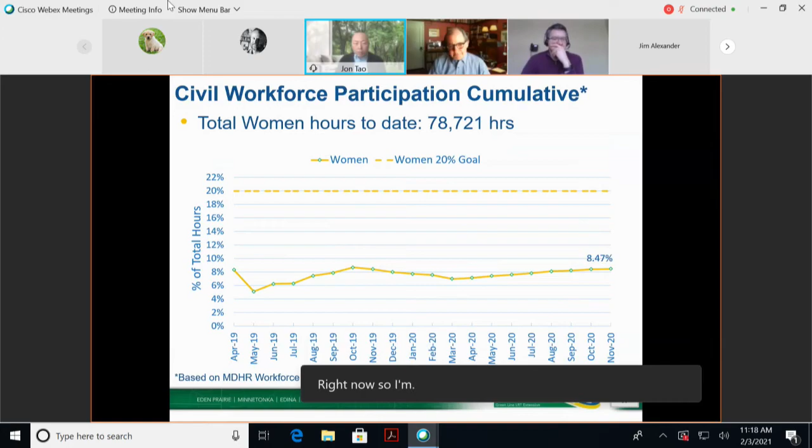So next slide. And then people of color, it's increased. And I think that over time, we have more that we can achieve. On other contracts, we're seeing 27%. So I anticipate that this will also jump up as we continue along in the project. Slide 87, please.

Okay, so this is the Franklin O&M workforce participation. I also want to say that we are not showing the systems contract just because the overall participation on the systems contract is only about 230 some hours. So it's pretty minimal. It's hard for us to really pull meaningful data for that. But if you're just looking at those 230 hours, the workforce participation for women is at 34% and people of color is at 29%.

So, it's exceeding the women participation, and people of color, it's pretty close to 32%. But we anticipate that once construction starts, those numbers will go downwards just in regards to the system work. But for the Franklin contract, we are also working with MDHR and Ellis Black to work with their subcontractors and look at different ways to increase participation.

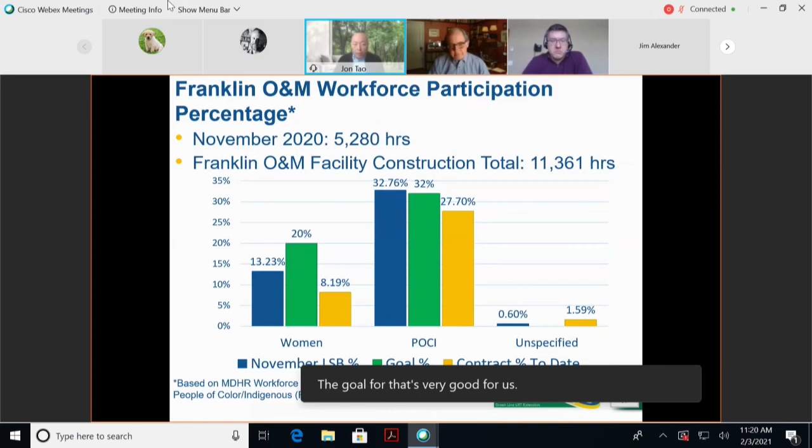Throughout winter, we consider that participation will continue to remain consistent here just because of the winter and without having the slowdown as what's going on with other outdoor construction activities. So their people of color participation, you can see, is exceeding the goal. So that's very good for us to see, and we hope to maintain that as we work with them throughout the rest of this year. And then next slide, 88, please.

So our monthly workforce good faith efforts meetings with them and MDHR, we started working with them in August, and you can kind of see some of the impacts that's had in increasing the participation and having the prime contractor be much more aware and try to search for different avenues to where they can increase participation. So these types of engagement and interactions between the different partners here are very helpful. And then next slide, 89. Thank you.

And then as you can see here, the 27% is what I mentioned before, is kind of on par with what we're also seeing with construction around the region. We, of course, are always trying to look at different ways and different programs and working with community-based organizations to see where we can plug in some of their trainees and graduates from their programs to get onto these construction sites and work with these prime contractors with hiring. So. And then I believe this should be my last slide.

Thanks, Jon. I know that even myself, talking to the prime contractor, has confidence that the workforce numbers will increase maybe in the spring as we work with both the contractors, community organizations, some strategies to work on that. One question that came in the chat and from Councilmember Ferguson that I see is also in the minutes from a year ago is have you looked at disaggregating the data from the DBE numbers? You know, it does combine women and other disadvantaged business. Maybe get a people of color number for the DBE area.

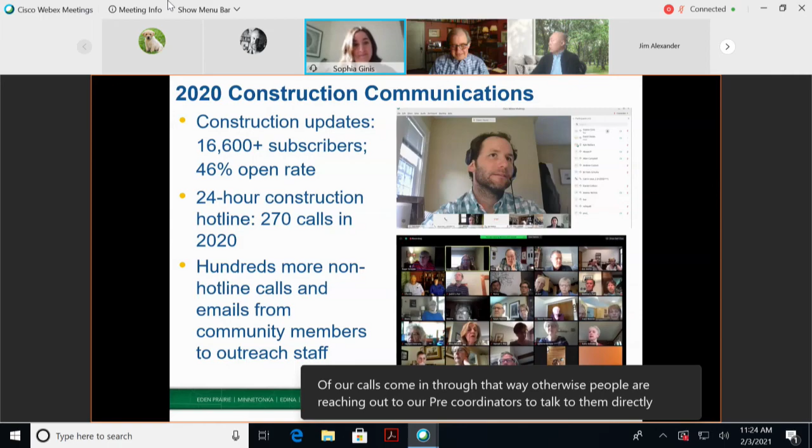Our construction information work groups are a pivotal part of our work. We really rely on the community to help us refine and improve our communications, as well as talk deeply about what's going on. So the committees have continued to meet through the year. They all have a slightly different frequency in which they meet, and we will continue that work into next year.

A couple things to highlight in 2021 is that we've started some virtual town hall meetings, and we'll continue to do that. We also have some pretty exciting videos coming out that are virtual tours that we'll post on social media. As we've been in this COVID environment, we've tried to find innovative ways to reach and pull people into the project in ways that we can't really do in person yet.

Thank you, Sophia, and you and your group have done a great job. I get a lot of comments about how disruptive this project is, and this is really terrible. But I love your people; they really are responsive. So it's good that we're doing the best we can and communicating as well as we are. I look forward to actually having in-person meetings, and maybe this year we'll have some elements to celebrate, like laying some track and looking more like a real railroad. Any questions for Sophia on this outreach?